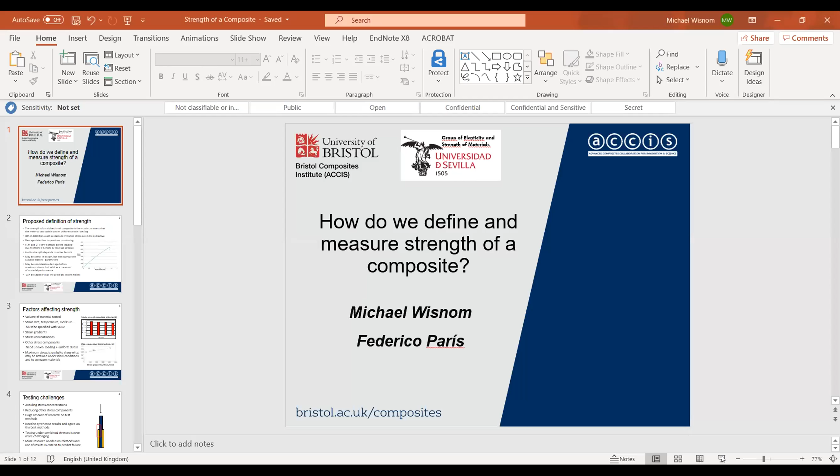It's a difficult question and there are many definitions, but the one we proposed is that the strength of a unidirectional composite is the maximum stress that the material can sustain under uniform uniaxial loading. Other definitions could be much more subjective. If you take damage initiation, for example, it's not very clear exactly where that is, and that depends on how closely you monitor the specimen.

Federico will say a bit more about this later, but if you look at that stress-strain curve, most people looking at this would say straight away it's 550 megapascals. But if you look carefully, you see there's a little glitch at about 380, where the specimen is actually subject to some delamination. So you might easily miss that. If you look more closely you might see it. If you look with a SEM or CT scanning in situ, you'll see it failing even earlier, and in fact there are quite likely going to be damage due to intrinsic defects or residual stresses even before you actually put any load on it, if you watch it closely enough.

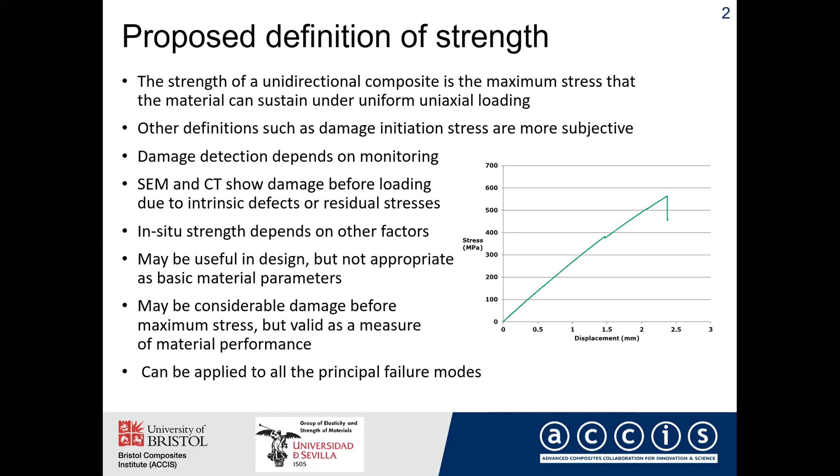So let's talk about some of the issues, some of the factors affecting strength. One factor which is still not widely appreciated is that the volume of material tested affects the strength. You see on the right some results for tensile strength of different size unidirectional carbon fiber epoxy specimens. As the size of the specimen increases, the strength reduces from about 2,800 megapascals down to about 2,400 megapascals.

Of course, there are many other factors which affect the strength: strain rate, temperature, moisture. And I think the key point is that these must be specified with a value.

Other parameters which can also affect the strength are, for example, the strain gradient. This is particularly important in compressive failure. On the bottom right you see a graph of maximum compressive strain at failure plotted against strain gradient, from some tests we did years ago using a constrained buckling rig. As the strain gradient increases, so does the maximum compressive strain at failure. So we have to be careful to avoid strain gradients, particularly in compressive testing.

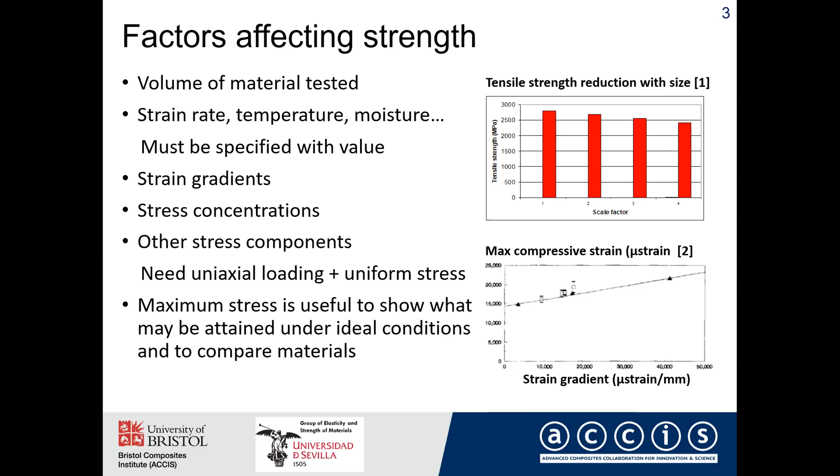It's well known that stress concentrations and other stress components may be present in a test and can affect the result. You need uniaxial loading and uniform stress, which is easy to say on a slide but not so easy to achieve in practice. But despite these caveats, we would argue that the maximum stress is still useful to show what may be attained under ideal conditions, and as a basis for comparing different materials.

There are a lot of challenges in testing composites. Avoiding stress concentrations and reducing other stress components are obvious ones. There's been a huge amount of research on test methods, but I think there's a need to try to synthesize that and come up with best methods. Despite all the work done by thousands of researchers and committees like ASTM and other international bodies, there's still a need for more work to synthesize and really appreciate the results, and try to reach agreement on which are the best methods to use.

And of course, testing under combined stresses is even more challenging. There's clearly a need for more research on the methods, and also on what we do with the results, how we use them in criteria to predict failure.

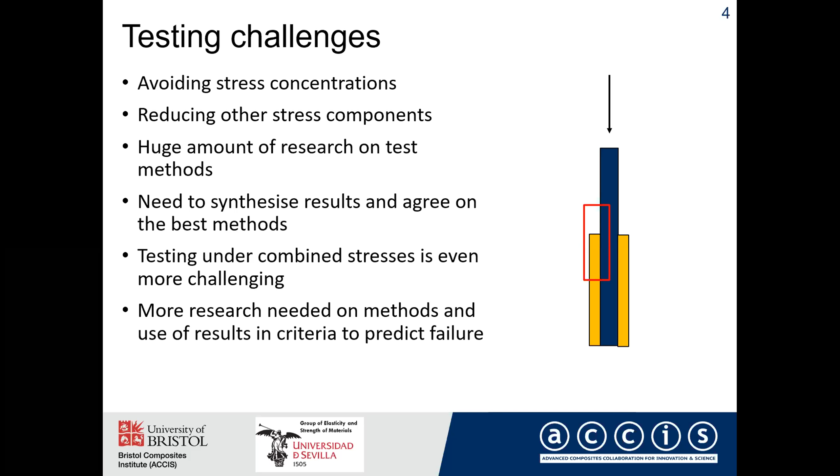Now, when we come on to laminates, it's a whole different question, very much more complex, because in laminates you have multiple potential failure modes that can interact. You've got transverse cracking and delamination, which can interact with the fiber direction response, especially at the free edge.

This top right shows some results we did some years ago on different stacking sequences. These are all quasi-isotropic tensile strength tests of the same size specimens, but you see there's a huge variation in strength just because of different stacking sequences and different ply block thicknesses. So it's not enough to say the strength of a quasi-isotropic laminate, because you can get almost any value depending on these different parameters.

The presence of other stress components: clearly in a laminate, if the laminate is subject to unidirectional loading, then you've got other stress components in the plies, you've got residual thermal stresses, and you've also got constraint from the other plies. All of these can affect the strength of that laminate.

As an example, on the bottom right are some results for carbon-glass hybrid laminates, which show that as the carbon ply gets very thin, the constraint of the adjacent glass plies leads to an increase in the carbon failure strain, quite considerable, from about 1.8 up to about 2.2%. So those sorts of effects mean it's very difficult to talk about the strength of a laminate, because it will depend on so many different parameters.

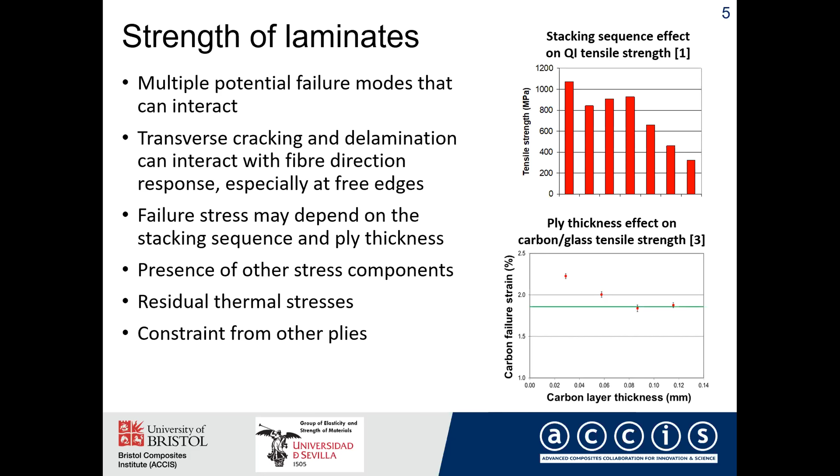Now, in principle, we could come up with a laminate ultimate strength. We could use tubular specimens, for example, to get rid of free edges. We could select the stacking sequences and ply thicknesses to try to avoid premature damage. But even if we could really do that, would that ultimate ideal laminate strength be useful? I'm not sure. And I think this is one of the things that causes perhaps a bit of confusion: why do we want this strength parameter?

Is it to know the ultimate strength of the material as a reference point, or is it something we want to use in design? For design, what we need is allowable stresses rather than the ultimate stresses. Sometimes I've heard companies complain about some tests because they give too high a value. So as researchers, we want to know what the ultimate strength is, but actually when you're designing, you want to be conservative and make sure you're not going to fail. So I think there's a difference between allowable stresses and actual fundamental strengths.

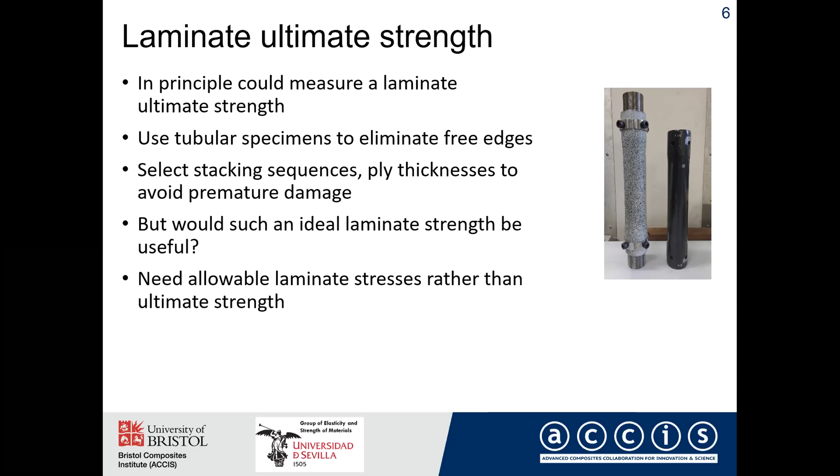If you look at things like notch strength, then this depends on all sorts of other parameters: the laminate thickness, ply thickness, stacking sequence, laminate width to notch ratio, all sorts of additional parameters. And compression after impact also depends on many parameters.

So these are useful tests which should give useful information for design, but they can't be considered to be ultimate material tests. They're not generating material properties. They're generating useful values which can be used in designing.

And strength of components, I would argue, is a structural phenomenon rather than a material phenomenon. In structures, you've got more complex stress distributions. You may have interaction through thickness and in-plane failure mechanisms. So it's much more complex.

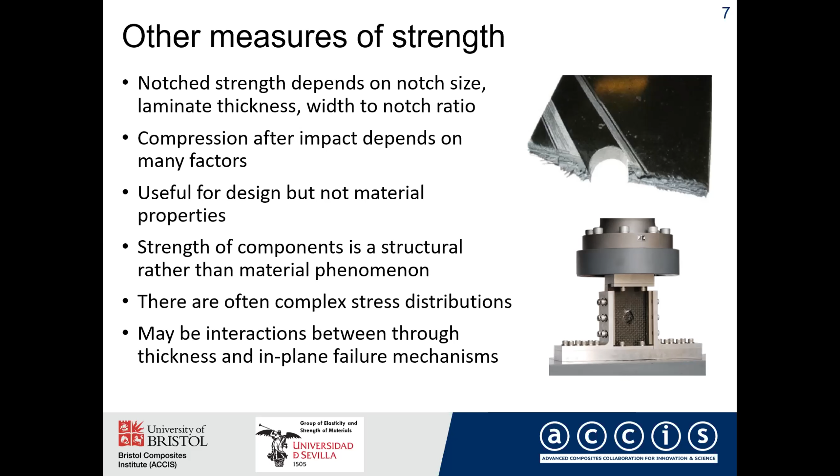So a bit about terminology. Failure strength is quite often used, the term, and I think this is a contradiction in terms, and I think it should be avoided because failure and strength are really opposite sides of that. So I think this is not a good term.

It's a mixture really between strength and failure stress. Now, strength and failure stress are often used interchangeably as well, but I think they should be distinguished. I think we should keep strength as a term reserved for basic, fundamental, unidirectional material strength, and failure stress we use for other cases.

So, for example, rather than talking about CAI strength or open hole tensile strength, we should talk about CAI stress or open hole failure stress. It might seem a small distinction, but I think it's important in being clear on our terminology.

And of course, we must also specify the measurement conditions under which these have been obtained.

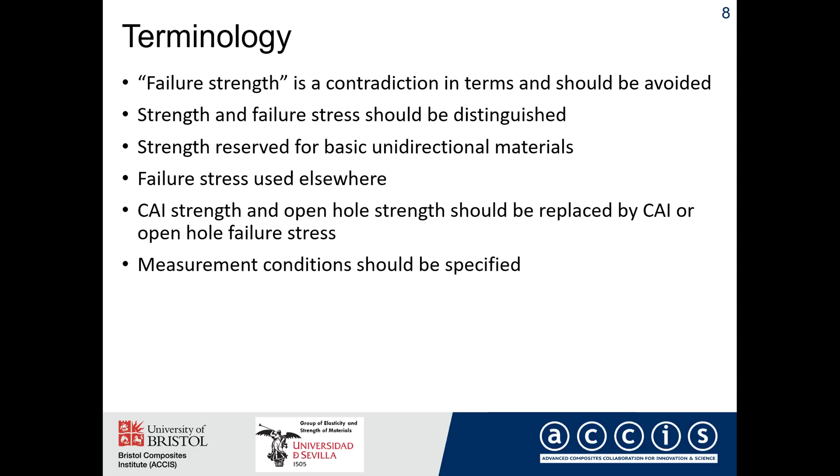So in summary then, we would argue that strength as a material property should only be used for unidirectional composites under simple uniaxial stress states, and that strength should be defined as the maximum stress that can be attained prior to total failure. It should be stated together with the volume of material and the conditions under which it was measured, and the strength should be measured under uniaxial uniform loading. And the results of laminate and structural tests should be referred to as failure stresses rather than strengths.

So that's my introduction of our paper. And I'm now going to hand over to Federico, who would like to say a few words and give an example, perhaps to illustrate some of the differences which I've mentioned. Federico, over to you.

Federico, I think you're muted.

Yes. Okay. Hello, everybody. First of all, thank you for participating in this meeting. And I have also to say that it has been, for me, a nice opportunity to share opinions with Mike, and I have enjoyed it a lot organizing this meeting.

I'm going to talk, as Mike has said, about one particular aspect of the topic at consideration that I had reflected by this expression: strength, damage, or rupture. And I'm going to talk about a particular case, which is the case of one laminate, a typical laminate, the 0/90 symmetric laminate, and what we typically assign or call scale effect or in situ strength.

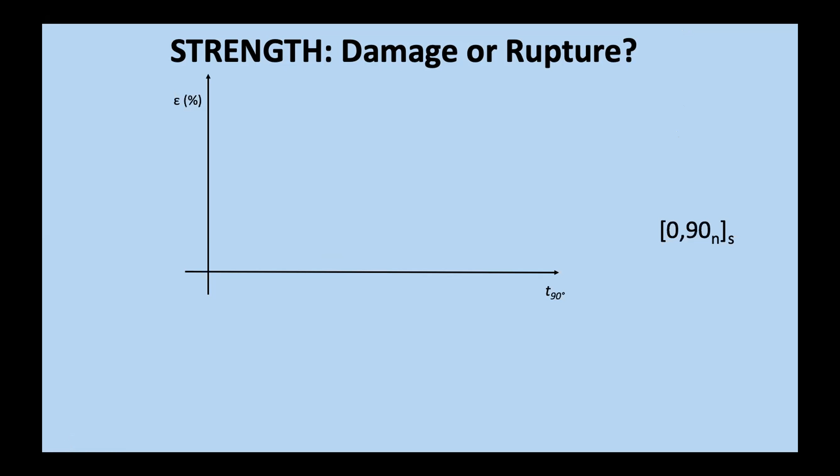So if we represent the value of epsilon that produces the failure in general terms as a function of the thickness of the 90-degree ply, we have, first of all, the value of epsilon associated to YT that we have obtained from a specimen applying a uniform distribution of stresses.

Additionally, we have another significant curve, which is the value of epsilon to produce the energy required to generate a complete transverse crack in the 90-degree ply. So typically both have been used as complementary criteria to decide what happened in a lamina, or a 90-degree lamina, put in a laminate.

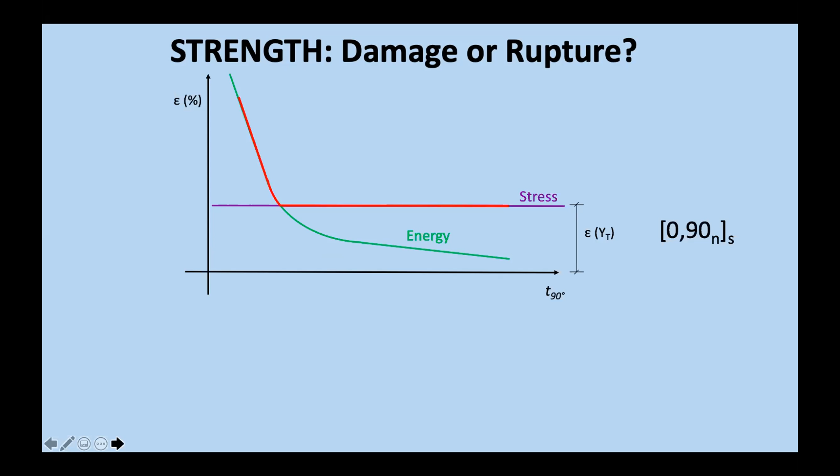So this gives rise typically to the in situ strength, a concept that assigns a value of the strength higher than that corresponding to the value of epsilon associated with YT.

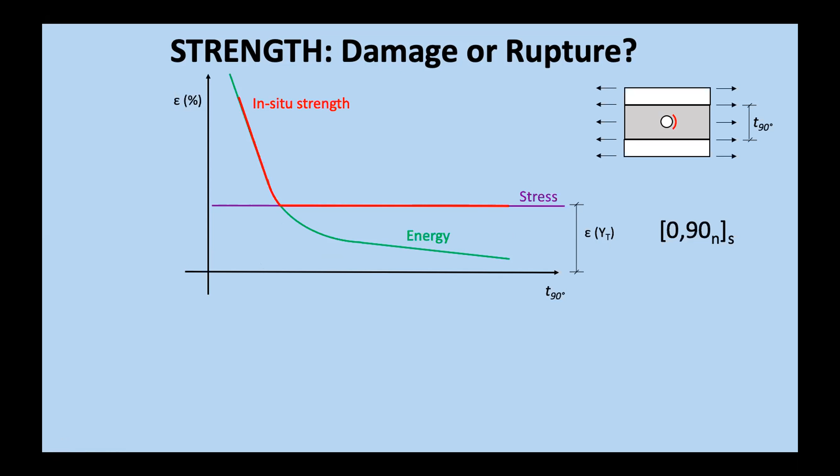But the question is that a couple of years ago, doing some numerical research, our predictions indicated that the appearance of one isolated debonding was not a function of the thickness, which was something that surprised us.

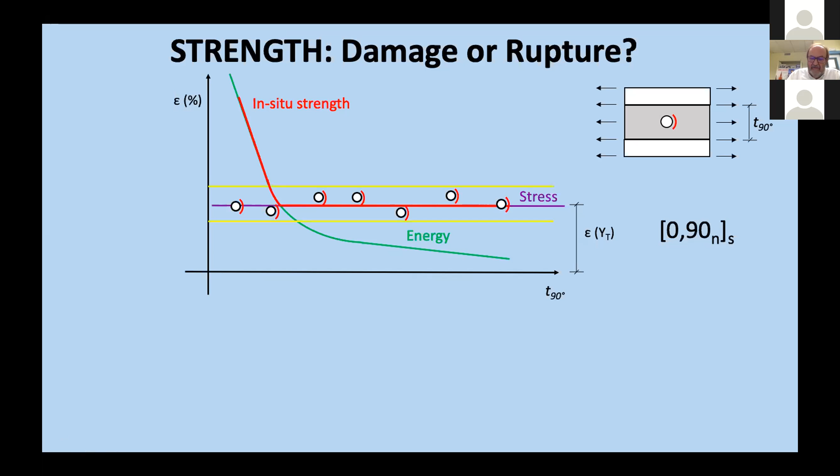So it means that, for instance, if we take a very thin laminate, I mean, a laminate with a very thin 90-degree lamina, we could have at this level of deformation of epsilon, one debonding, which would be independent of the thickness. So we would have, in accordance with the prediction, the same similar value. In fact, as it is a non-homogeneous material, we would have an interval where this appears.

However, when performing tests, the first thing you see of damage is indicated here for a very thick 90-degree lamina. So suddenly, with no previous indication, you will have a complete breakage.

You will have a complete breakage of the lamina associated with delamination. If now we go to a smaller value of the thickness, we have something similar, but without delamination. Even with a smaller thickness, we have something like this, where we have not totally reached the thickness of the 90 degrees, but continue in a similar situation as previously.

If now we move to this case, we have clear indication of isolated debondings. On the left-hand side, the original micrography, on the right-hand side, a recreation to see it clearly. So if we have a thickness like this, we have a situation with some isolated debonding, maybe connected. Now, what happens if we increase the load here?

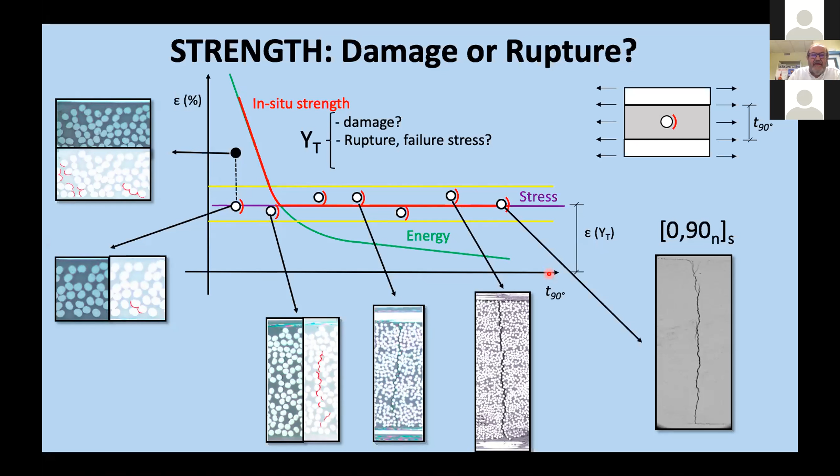So, to conclude, how are we going to proceed? If we want YT to be associated with the appearance of damage, then this value is correct for all types of thickness. If, on the contrary, we prefer, which is the typical approach, to have it associated to the rupture in a general term, probably it would be better to refer to this situation as failure stress.

And it would even be better to give a designer some indications about values that he can reach, not putting into question the integrity of the laminate.

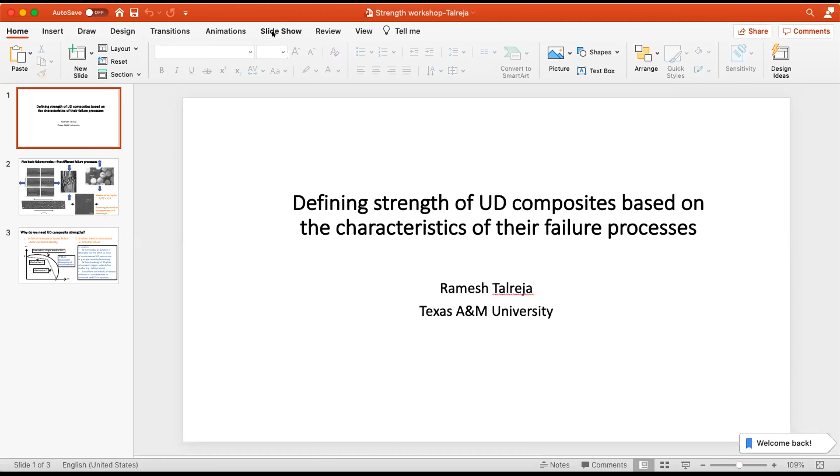Well, what I'm going to say is not really going to be anything new. In the white paper that Michael and Federico put together, you actually have lots of questions, and it's a broad discussion of the strength concept. What I try to do here in the next few minutes is bring focus to the idea of what is actually strength, and why do we need it, and in what context it is useful at all.

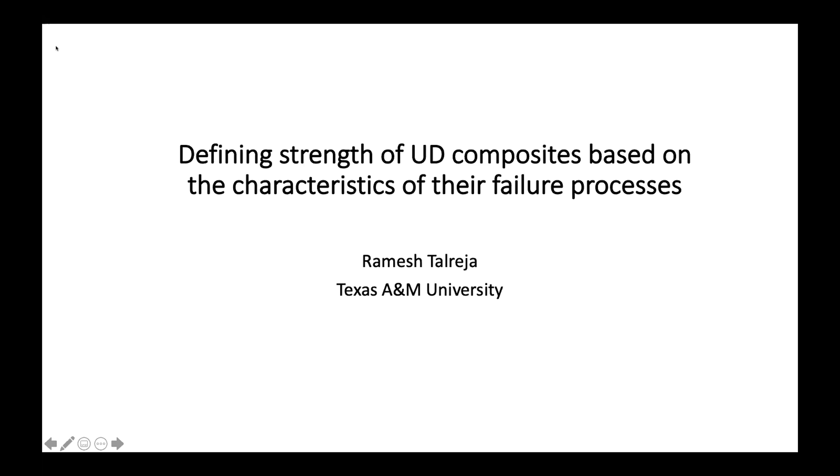So I'll go to the 2 slides that I have. As I say, a picture speaks 1,000 words. So what I have done here is take 5 typical pictures of how observations of failure mechanisms appear when you take a unidirectional composite and load it in 5 basic modes.

So you're looking at tensile mode in the axial direction, compression loading in the axial direction, tensile in the transverse direction, compressive in the transverse direction, and in-plane shear. Now, you may all know these things, seen this before.

If you keep in mind where the concept of strength actually comes from, it comes from metals mostly. And there, whether you load in one or the other way, in any of these 5 loading modes, there's only one mechanism, which is yielding. So initiation of yielding, that we call yield strength, and then ultimate failure that comes from continuation of yielding to a complete failure in one form or another.

But here in composite materials, each loading mode has its characteristic failure mode. Consider the tensile mode: it is highly statistical because it has to do with singlets and doublets and forming of a cluster of broken fibers. It's a highly stochastic process. Reverse the loading, and it's much more deterministic, much less stochastic.

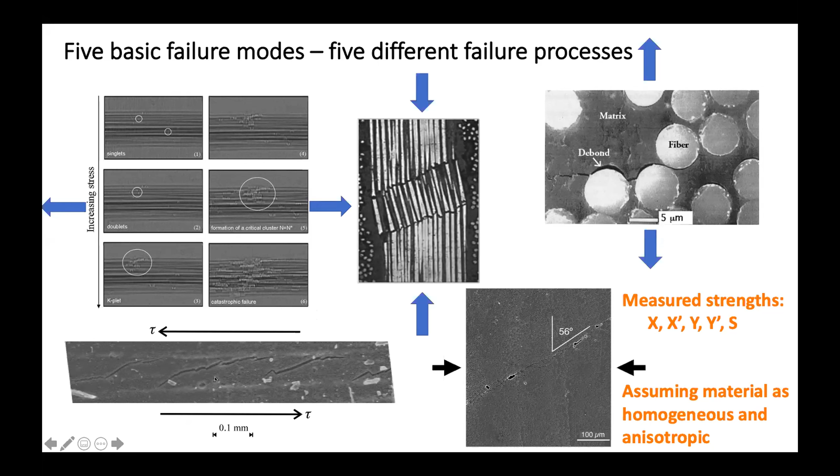It's not being caused by shear at all. So these cracks that are there, they are most likely because of a tensile stress locally here.

Now we ask ourselves, we follow the tradition of centuries working with metals, and we give designers something that we call strength. What is really the utility of that? I'm going to take two areas in which we typically want to use the UD composite strength.

One is in combined loading. There's hardly any structure that doesn't have combined loading, right? So if I am applying any of those two of the five modes of loading that I described, and I plot one on the vertical, other on the horizontal, and I ask myself, if I combine those two loading modes, what's going to happen? Our thought process has this legacy of metals where we find that the von Mises criterion gives this sort of a curve.

But what we probably forget is that it is talking about driving forces under combined loading for one single mechanism, which is yielding. And therefore, a smooth curve like that is expected.

Here, what's happening, if I take one of the failure modes here, other failure modes here, they cannot talk to each other at all. Their driving forces are very different. All they can do is, when I do combined loading versus single loading, the local stress state and therefore driving forces change. It's not the mechanisms that are interacting, it is just the stress state that is changing.

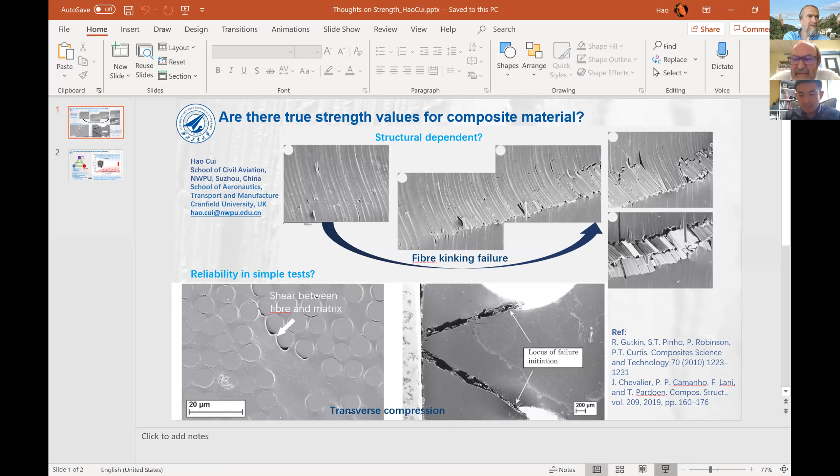Okay, so here I'm trying to ask a question to all of you. I'm not sure if it's the right question or if there's a right answer to it, but hopefully I can spark some discussion later on, or some thinking about the terminology of strength itself.

Here are two images from Silvestre Pinho, who is here as well, and Pedro Camanho, on two different tests. The first is fiber kinking, the failure of composites in longitudinal compression. Shown very perfectly here, in fiber kinking failure, we're trying to measure the strength of the composite in longitudinal compression. The failure is normally initiated by interfiber shear, which can happen in a unidirectional compression test because of, for example, misalignment between the fibers against the loading direction.

This makes me start asking myself: is there a true intrinsic strength for composites in longitudinal compression, or is it rather a structural property even at a unidirectional lamina scale?

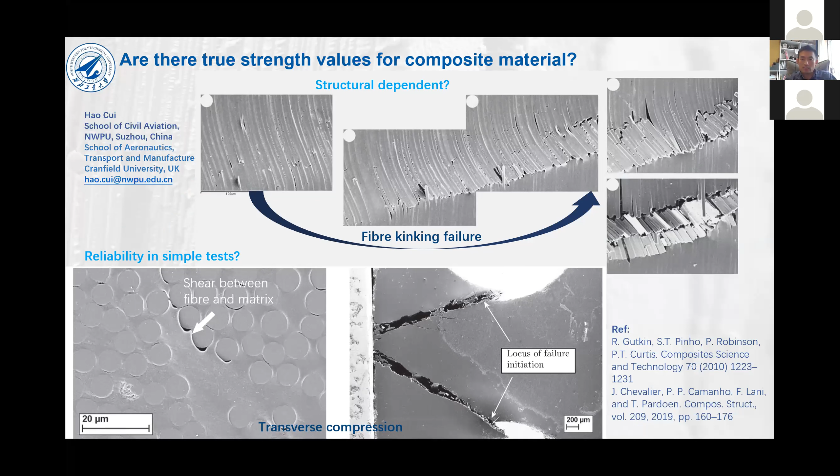When we talk about the strength of a laminate, we have evolved this homogenization process. So what are the consequences of this homogenization? First of all, we have ignored the edge effect at this small scale — for example, we cannot account for the shear or other secondary stresses at the edge.

How do we get a better idea about the consequences of homogenization when we go from a single fiber and matrix to a unidirectional lamina, and further to a multi-directional laminate, where we can even consider it quasi-isotropic? What are the consequences, and what errors are involved in this whole process?

One way I'm thinking about this is, as many of our partners and colleagues have rightly mentioned, the size effect. We see a lot of this — for example, Michael has done lots of work, and many colleagues like Frédéric as well. The strength changes a lot as the volume of the sample increases.

Can we see a similar effect at a macro scale? Hopefully so, because this will help us reach a conclusion on how much error is involved. Because here I see there's a gap.

In numerical modeling using RVE, where we model each single fiber and matrix, we cannot really go very big — there's a limit in computational resources. And for experiments, we cannot go very small. So there's a gap here.

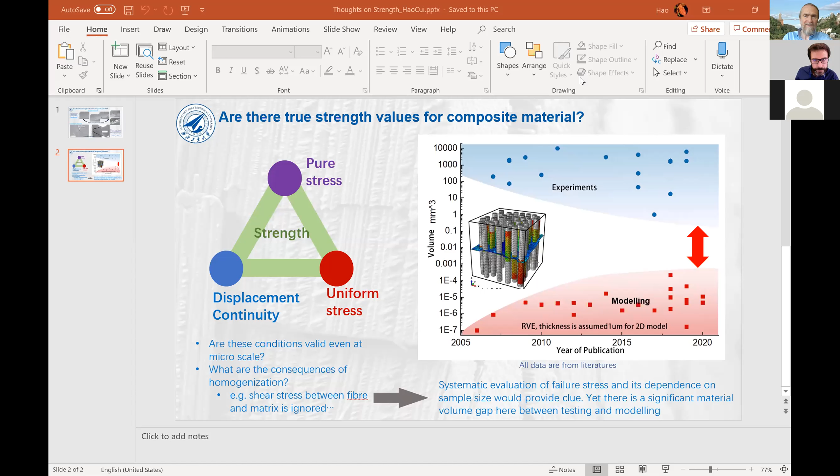Yeah, okay. So I'd like to touch first on the definition of strength. If you look at the dictionary, it allows for strength to be used in many areas: strength of coffee, strength of a market, strength of feelings. If we take dictionary definitions that apply directly to mechanics, we have definitions such as power to resist force, the degree to which something is strong or powerful. And so the use of the word strength when referring to the strength of a structure, say a beam, a bridge, an aircraft wing, or even a multi-directional laminate, from that point of view, seems legitimate to me.

So the key thing to me, I think, is that strength does not necessarily imply it's a material property. The concept does not come from material science. And so we should, I think, be able to use the word strength without the implication of material property. And so if we apply it to compression after impact or open hole, if there is no confusion that we are not referring to material property, I don't see from the standpoint of the definition of the word why it doesn't apply.

Talking specifically about multi-directional laminates, so one of the things that you were saying before, Michael, that the failure stress depends on the actual layup, depends on ply thickness, depends on the interaction between failure modes inside the laminate. I agree with all of that. It depends on those things.

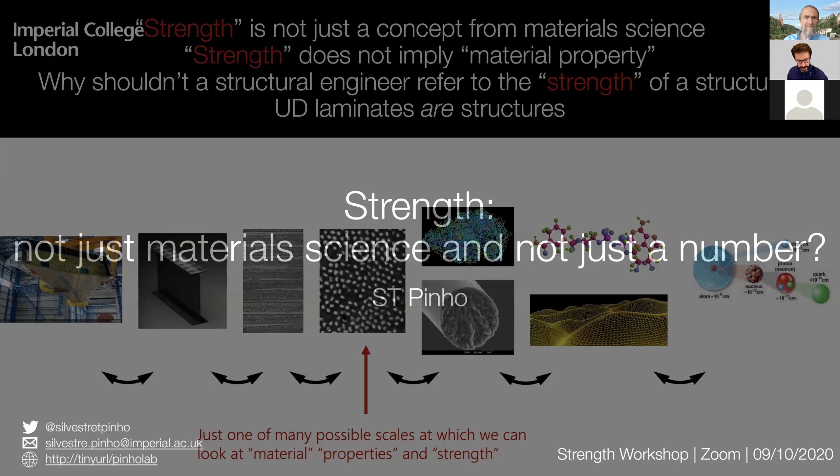Anyway, so if we turn to UD laminates now—oh sorry, I was not showing the right slide. So if we look at the different scales, we are focused at this scale here. But I think that if we were to talk to people manufacturing carbon fibers, they might look at our UD plies and think that this is a structure. And so I think people manufacturing beams could say that for them, they want to talk about the strength of a beam as being a limit bending moment, for instance. People looking at graphene, they might look at the fiber as actually being a very complex structure made of graphene.

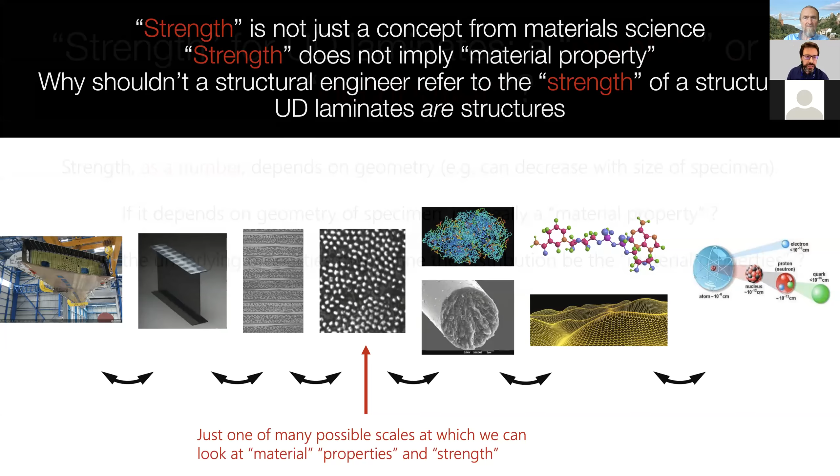But anyway, if we talk specifically about UD laminates, then I'm not quite clear about what definition of strength and of material properties we should have for the strength to be a material property. So we know, and Michael showed this really well, that the strength as a number, say 1000 megapascal, depends on the geometry. It decreases with the size of the specimen. So the strength is a property of the material and of the specimen used to measure it. So it's not a property of just the material.

And if it depends on also the specimen, is it really a material property? Or should the underlying properties that define the strength at each different size be what we consider a material property? So for instance, if we agree that longitudinal tensile strength follows a Weibull distribution, then perhaps the parameters of the Weibull distribution would be material properties, but not the strength at a specific size. Anyway, or otherwise, we could consider that the strength is a stochastic property, not just a number, and then that stochastic property is defined by a distribution.

Anyway, there are two things here about this. One of them is, when we say, is the strength really a material property if it depends on the geometry of the specimen—well, we've not defined what a material property is. And I guess the question is, can we define material property in such a way that we allow it to depend on the size of the specimen used to measure it? What definition would that be?

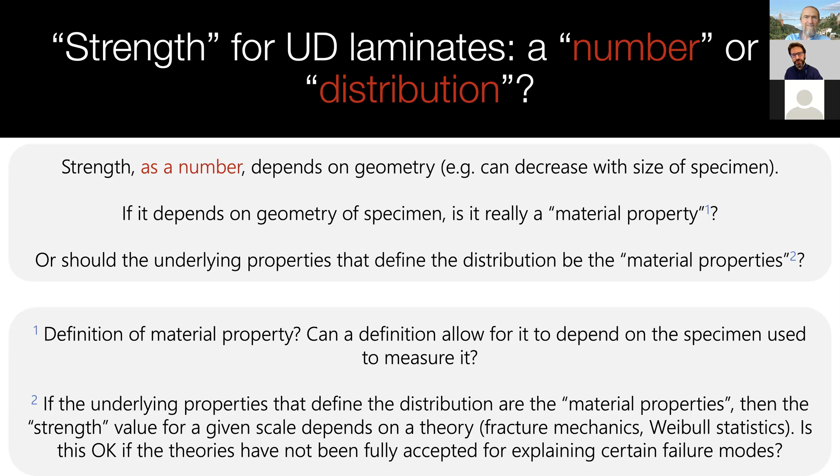If the theory is not clear, then defining strength for the underlying properties becomes tricky as well. And so this is what I wanted to talk about. I'm not exactly in agreement that we cannot use strength in a non-material science context as a summary. I think that if we talk about strength for a UD ply, then perhaps we are not looking at a deterministic variable, but perhaps at a stochastic one.

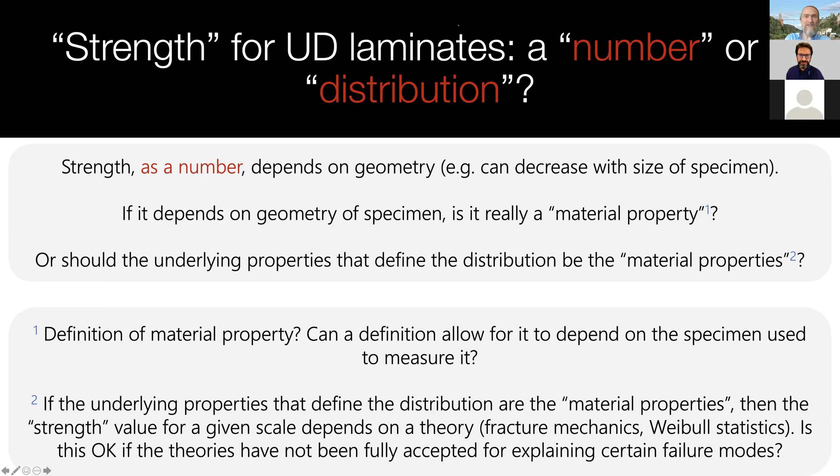Yes, yes. Tony's from the University of Michigan. Can you see my screen? Yes, if you want to put it on full screen mode. Yes, there is. Okay, all right. Thank you. Michael, can you see my screen and hear me well? Okay, yep, so let's start.

Well, thank you for inviting me, and also for giving me an opportunity to share these slides. I think the previous speakers have very nicely laid the foundation for what I have to say. We've heard some really good remarks from everybody who spoke previously. But here I want to make a few comments, sharing my experiences working on this subject for about 35 years now.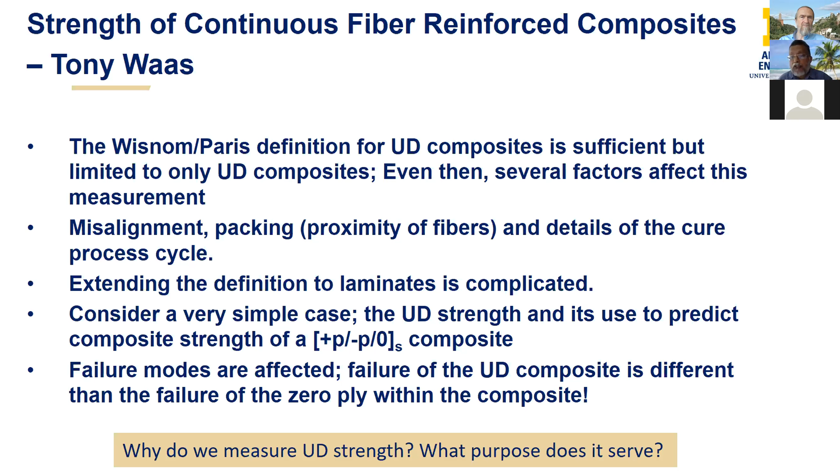So it's very important - failure modes are changed. Finally, what I captured in my previous comments is basically captured here.

Three things I want to say. First, the manufacturing process is important - it can influence the values we measure. So lamina strength is a complex quantity. I have already made that point.

Second, we must do scale-dependent experiments. The speaker from Cranfield said the same thing in a different way. We must have scale-dependent experiments, and there's a gap, right? You can do very small simulations at the nanoscale, but it's difficult to do experiments. You can do experiments with larger specimens, but then simulations won't help you that much.

Finally, we must define homogeneity. If I want to really go back to Michael's definition, we must define what we mean by homogeneity. It tells you clearly, when you start thinking about it, the length scale you're operating in. Homogeneity is a length scale definition, in my opinion. And so with those comments, I'll stop there and I look forward to listening to everybody else.

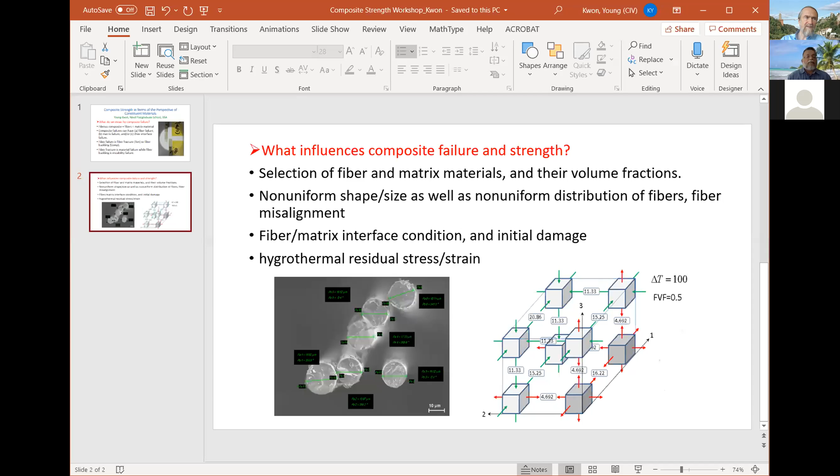So before we talk about the definition and measurement of strengths of composite, I'd like to see what really contributes to the strengths of composite. Since composite is made of fiber and matrix material, I'm going to talk about composite strengths in terms of the perspective of constituent material.

So as you know, composite is made of fibers and matrix, or sometimes you call it particle if the fiber is short and almost the same dimension in every direction. But anyhow, those are the two major materials making a composite. And of course, we are talking about long fiber composite, but it could be short fiber or discontinuous fiber, or sometimes woven fabric composite. But in any of those composites, if you look at the failure at the constituent material level, such as fiber and matrix material level...

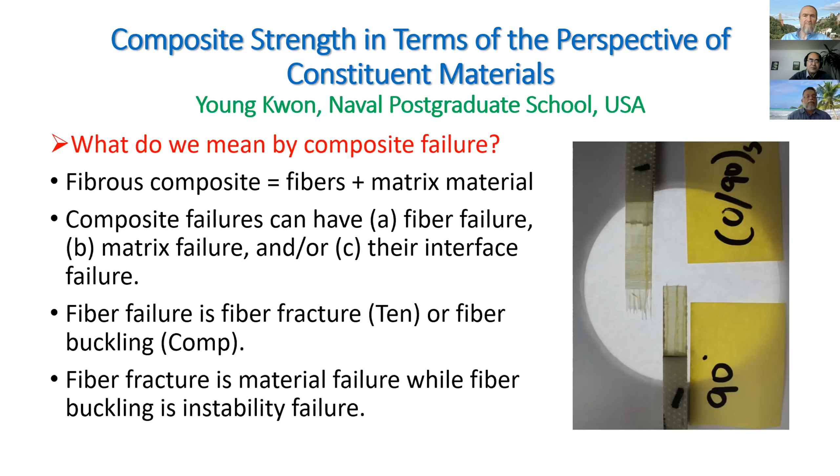And then going to the second question - what really influenced the composite failure and eventually the strength of the composite?

There are many parameters influencing failure mode and failure strength, some controllable and others not. The most significant parameter is the selection of fiber and matrix material, which we can control, along with their volume fraction. That is going to be one of the main parameters defining the failure and strength of that particular composite.

But other parameters, such as shape, size, and more importantly, non-uniform distribution of fiber and fiber misalignment, we cannot control that well. Also, depending on the curing process and the fiber-matrix interface condition, those are also not well controlled, and we have to accept them as they are after the curing process.

There is also some initial damage, such as micro voids or debonding between the fiber and matrix during the fabrication process, and those are going to also affect the failure.

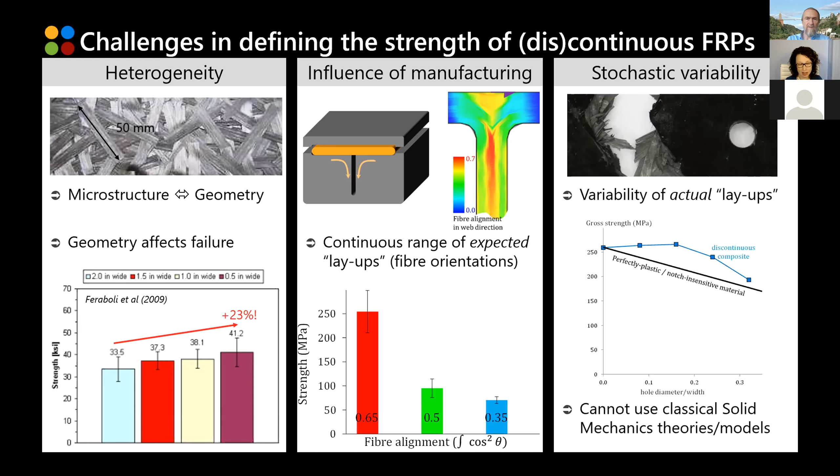So what I would like to discuss now is not the reason why this behavior appears - we understand that, we can even model it - but to actually think about whether we can use some of the discussion we're having in this workshop, mostly for unidirectional composites, and apply it to other types of composites. The first thing I'd like to think about is why do we need to define strength?

Several other people highlighted that it's important to understand why we want to define strength. I think one of the reasons is to guide the material selection and to guide the development of new materials, so we can compare a material against another one.

But again, let's assume we know what our definition of failure is, and we've got a good understanding of what our material strength is. That doesn't mean we're out of the woods yet, because there are still plenty of additional challenges when it comes to then making use of that strength.

So I just want to touch on a few different cases from our work at Bristol, where variable effects can be observed, particularly as one moves up the length scale. If one looks at laminate or coupon level tests, I've got two examples on the screen here, both of

which have localized stresses. On the left-hand side, it's a multi-directional laminate where locally one gets a bit of surface matrix cracking, and that surface matrix cracking leads to some small corner delaminations at the intersection between that matrix crack and the free edge. As you can see from the FE analysis, we get a local stress concentration, and that stress concentration becomes high enough to influence the overall failure of the specimen.

If we look at the net section stress from classical laminate analysis and our useful strength, we'd actually overpredict what is the measured strength. So we really need to understand the mechanisms and their interaction.

This has been touched on by several speakers already. On the right-hand side, we've got a different case with a much higher stress concentration from a sharp notch, which leads to local blunting due to some damage. The crack is starting to propagate, so we have now exceeded the material strength, but in this case local failure does not lead to catastrophic failure, and the specimen is able to continue carrying load.

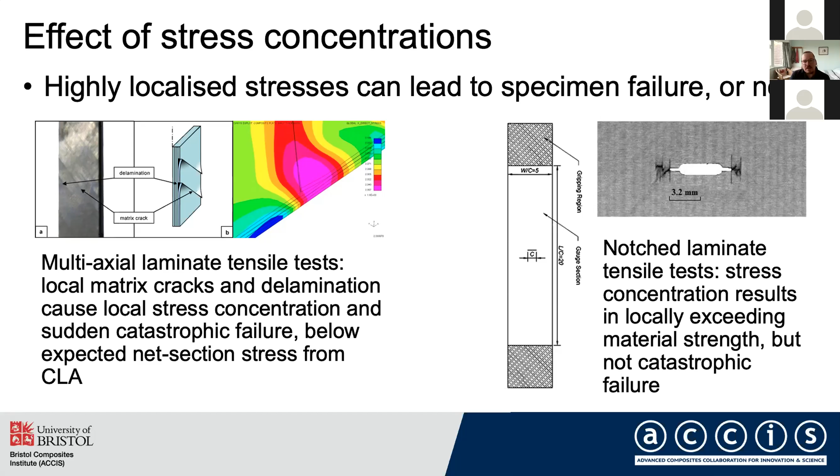Going even further to more structural level loading, where we are looking at more complex geometry and stress states, we measure strength, as Michael and Federico suggested, in a unidirectional stress state, but at a structural level we are more likely to encounter multi-axial loading.

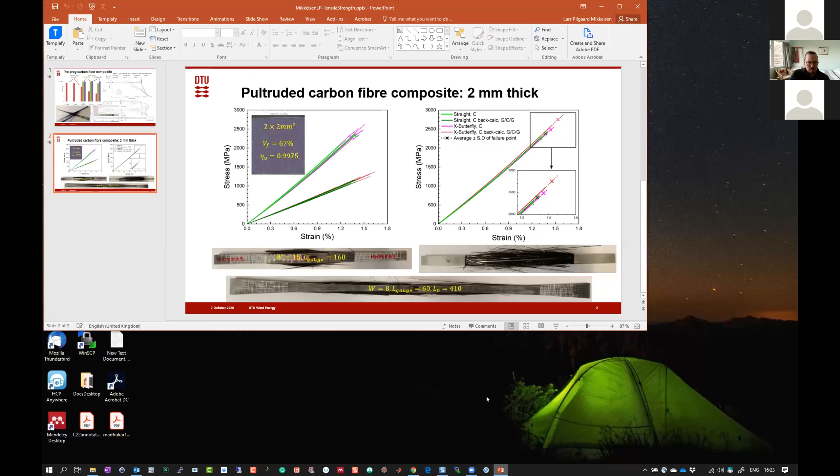Can you see my screen? Yes, that's fine, thank you. Just want to... Yeah.

So I will go down to a very simple case: finding the tensile strength of a UD homogeneous distributed carbon fiber composite. This is a prepreg. We have two studies, one of a prepreg carbon fiber composite and one of a pultruded profile. You can see the structure is rather uniform, and the color codes here indicate the misalignment going from 0 to 5 degrees, so the alignment is really well aligned.

It's a prepreg, so we have a layer structure which you may be able to see here. We tested this sample, putting up more and more layers from 3 plies to 10 plies, and then used 3 different geometries to test that. If you take the rectangular test sample first, that's the red columns here, as the sample gets thicker and thicker with more plies, we can see at a certain point our strength will decrease. We can calculate that we go from a constant stress value to constant load values, indicating something described by a load during the failure, probably some failure happening outside the gauge section.

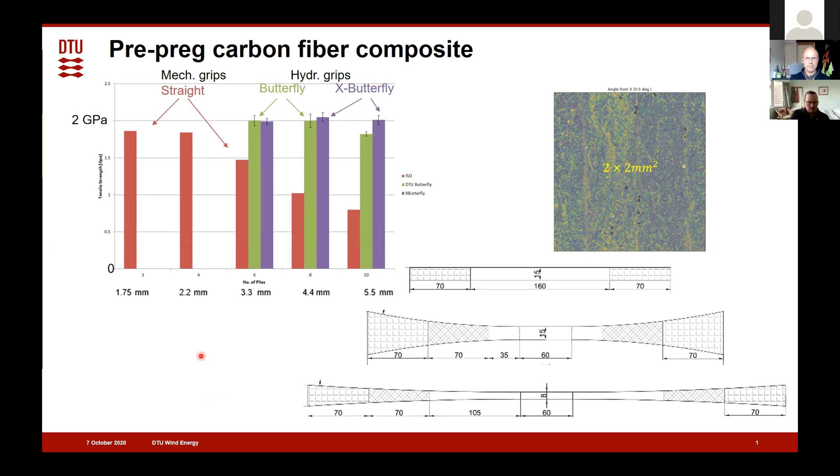So in some way, this is a way to investigate what is controlling the failure of our test sample. It may be difficult to see on the failed sample. So what is the reason for this?

If you do a simple stress analysis of the 3 geometries here, then the blue curve here is corresponding to the rectangular sample, and the green curve is to the long butterfly sample. We have some stress intensity - this is the normal stresses in our sample - where we have the end of the tab material. For the other 2, we have tapered tab material here going from 2 millimeters thickness down to 0 thickness here, and we can see there's also some stress intensity here.

Smaller for this one. I have here shown the normal stresses just below the surface of our test material. But what is more critical, I think, is that - so here this is a stress value - if you look at the shear stresses at that region here, the dashed line here is the thick one and the solid line is the thin one. You can see that we have rather high shear stresses near the end of the grips.

And that's for all cases, so also for the butterfly and for the X butterfly, we have larger shear stresses because that's the only way we can introduce the load from the grips into the test material. So the load levels for the shear stresses are quite high compared to, I would say, the expected shear strength of the composite.

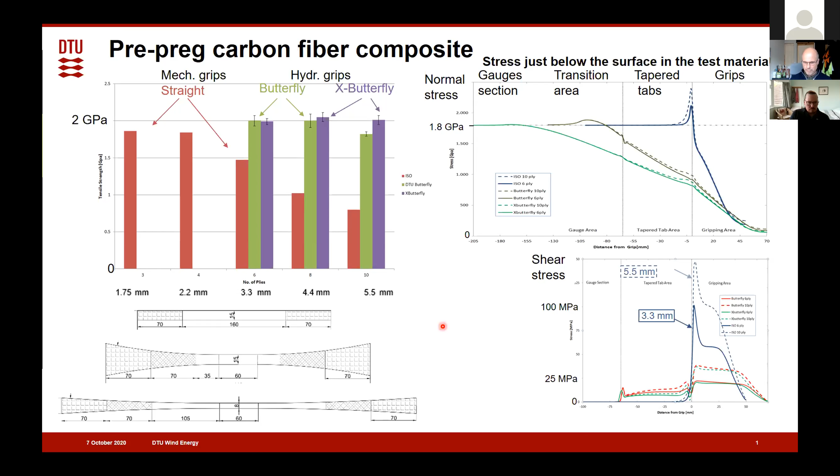And here is indicating, showing the failure of this composite here. You can see this a lot of fiber failure and splitting of the test sample. So it can be hard to identify where the failure happened.

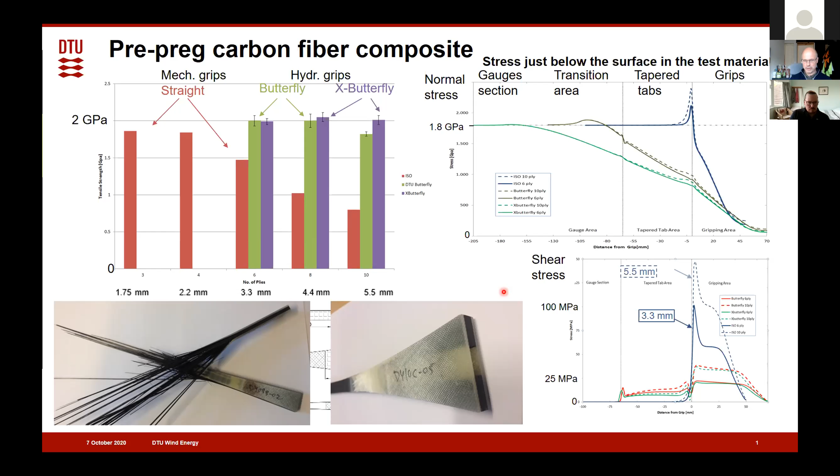For the thickest one, we can see that we have this shear failure between the tab and test material, and we also, for the butterfly shape, we also have splitting along the UD fibers. So this is for the pre-preg carbon fiber composite.

But we have done a similar study for the pultruded carbon fiber composite. For that, we cannot vary the thickness because that's given by the pultrusion profile or the pultrusion process. So here we have a 2 millimeter thick sample again, or even more.

Here we have a case where we have rather uniform distribution of fibers, very aligned fibers. So here's this fiber orientation efficiency factor, which we can calculate - that's reduction, which corresponds to, you could say, the misalignment of fibers, which is very small here. And we also have, for this, even a higher fiber volume fraction.

For the pre-preg, we have 60, but here we have - what is my point? Okay - here we have 67% fibers. This is a rectangular sample, where we can do the tensile test.

Then we need to have - I'll come back to that, the reason for that - how to define when the composite is failing. So here we would like to talk about strain to failure. And here the strain to failure value is defined as the point for max stress, but where we are ignoring this local failure happening before the max load point, by doing a polynomial fitting of our tensile curve. So this test here is then going to one line, and then we have the scatter of the different samples and the mean value of the stress strain curve.

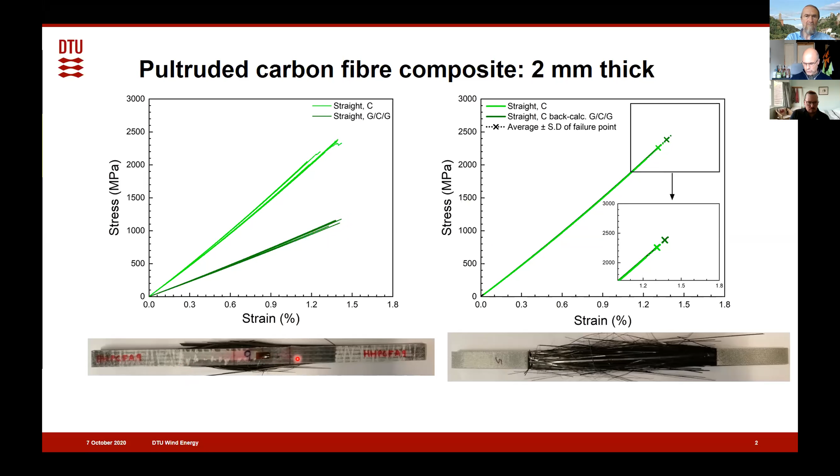But then if we subtract the glass fiber effect, we get the stress value in the carbon fiber. The strain to failure, we just take the values here and put them over here. So we can see that the strain to failure is larger for the case where we have this constraining layer on both sides of our pultruded profile.

Now we could try to do that also for the butterfly shape, and here I only show the results for the extra long butterfly shape. So this is the same shape as before, but now we have put a constraining layer on top of the material, thick enough so the sample will survive the failure of the carbon fiber.

And now we get the purple and red lines here. The red is for the constrained case, and the purple is for without any constraint layer on our extra long butterfly sample. We can see that for the constrained version of the butterfly, we even get higher values here, indicating that we may be closer to the true strength of the pultruded carbon fiber.

But how close we are is actually a good question. You may say that this could be due to a scale effect of our composite. We know there's a lot of, you could say, size effect in the fibers, and we have tested that and find the exponent n value equal to 7. But for the composite, the question is what is...

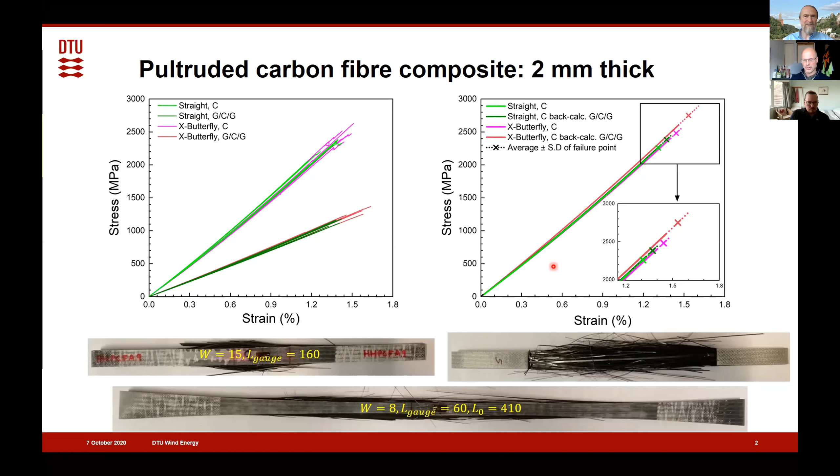But the size effect could only account for about a quarter of the measured improvement of the strength going from the rectangular sample to the butterfly sample. So that's, in short, the conclusion from the size effect. Okay, so thank you very much.

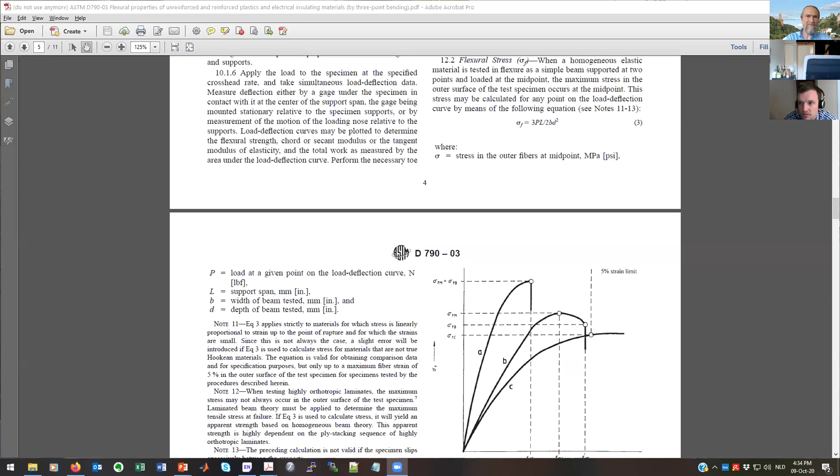So I want to talk about proper tensile testing of UD composites. This is very much in line with what Lars was just presenting. But I want to start off by saying that if you look at the literature and all the tests on pure UD composites in the fiber direction, I would argue that 95 to 99% of that data is actually not reliable. I hope you will be at least somewhat convinced of that when you see some of the results I'll be presenting.

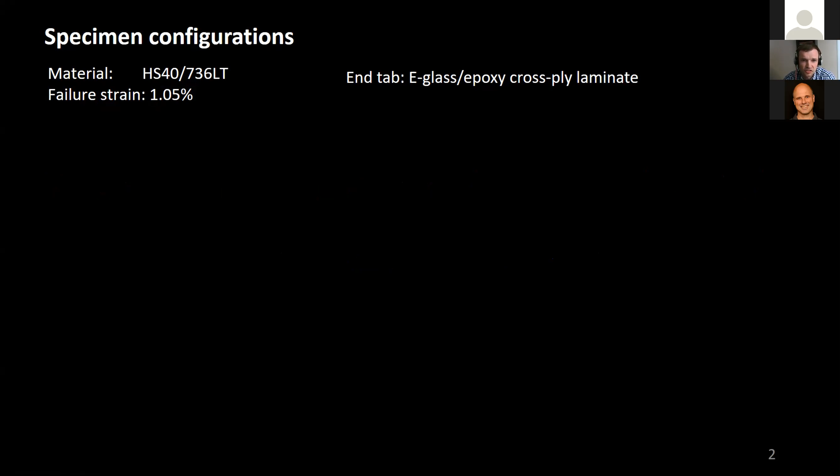So we did a range of tensile tests on UD composites, using HS40, which is a relatively brittle carbon fiber with a failure strain of 1.05% according to the data sheet and a stiffness of 455 gigapascal.

We put end tabs on this, using standard E-glass epoxy cross-ply laminates. We did 6 different configurations, shown here schematically. We used the default approach with no end tabs, then the normal end tabs with a 90-degree corner, then the tapered design which some people believe gets slightly better results than the 90-degree corner, and then the continuous end tab design developed by Michael.

We did something similar with the butterfly design as presented by Lars. And then something more exotic that you don't see often in the literature: arrow-shaped end tabs. These tabs are designed so that the length from this part of the tab to that part is always equal to 150 millimeters, so the volume we're testing is the same as in some of these other specimens, apart from this one where the gauge volume was a bit different.

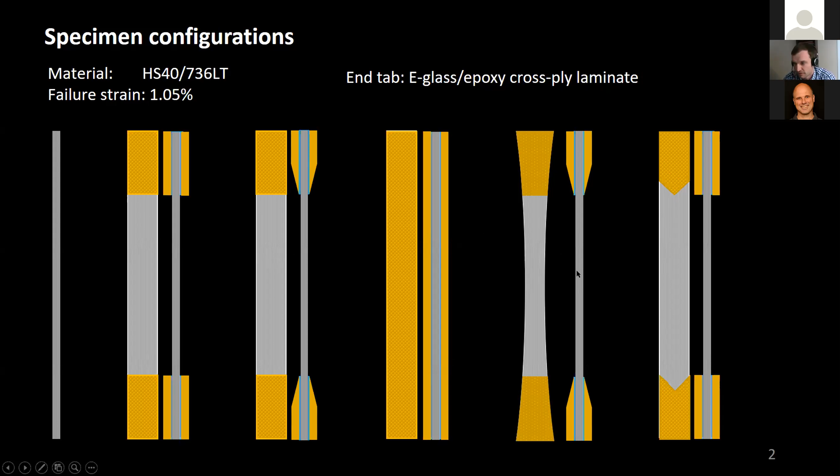If we first look at the first 3 types of specimens, we plot the results in terms of failure strain, since with the continuous end tabs we cannot measure strength directly. If you compare failure strain to the datasheet value I mentioned, you see that for the pure UD with no end tabs, you would get a significant underestimation. But even if you add end tabs, either straight edge or chamfered, you would still be underestimating the datasheet value.

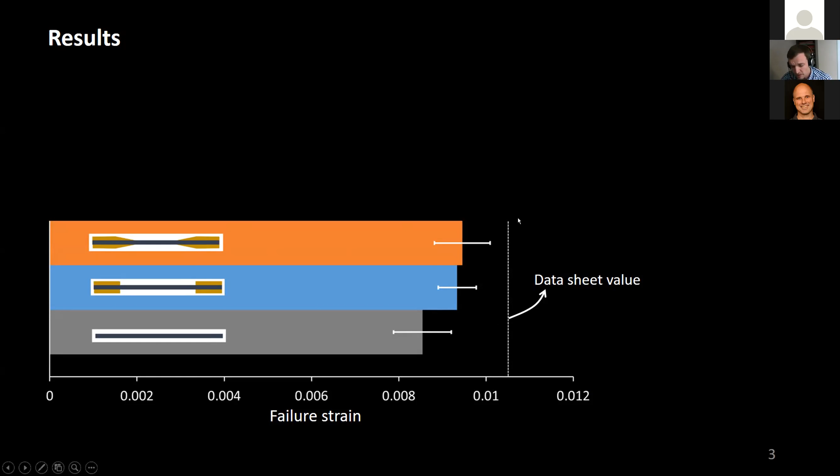Now, if you analyze the continuous end tab design, you actually get pretty close to the datasheet value.

A few things important to point out here. Our plies were well above 100 micrometers, which means there is no hybrid effect, at least if you correct for the thermal residual stresses. The difficulty is that this is actually not a technique that you can directly measure strength with, because that strength requires a back calculation, which introduces some additional error.

So that's why it's better to look at the failure strain in interpreting the data from this type of specimen. The great thing about this test is that you know where the failure happened, and most of the time that actually happens away from the end tabs, nicely inside the gauge section. And that is a big problem with all the other specimen designs, for which if you don't know where it failed, you cannot know whether that particular test was reliable.

Because you don't know whether it failed under uniform stress conditions. So then we had big hopes for the butterfly design, but unfortunately this was in some regards the worst test, in the sense that this gave us the lowest failure strain. I think that is an indication that this was not a very good test, at least not for this specific material. I should also point out that this was the only test that had a smaller gauge volume, which you would actually expect to lead to a slightly larger failure strain or strength.

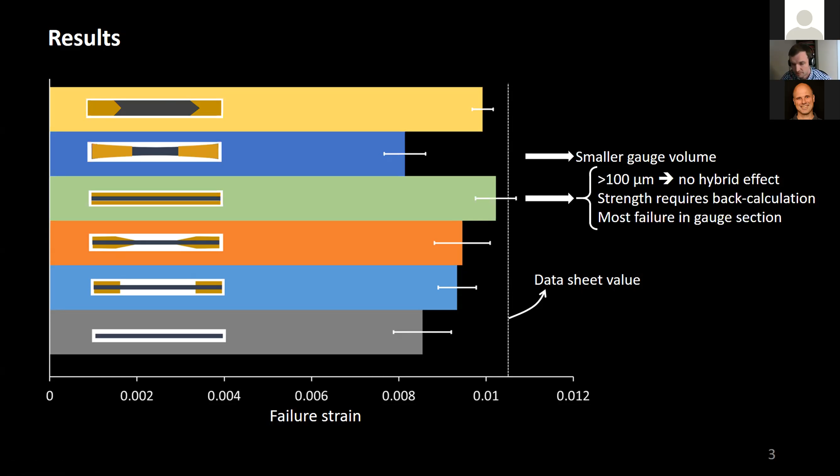And with that, I'll leave you to it, and thank you for your attention.

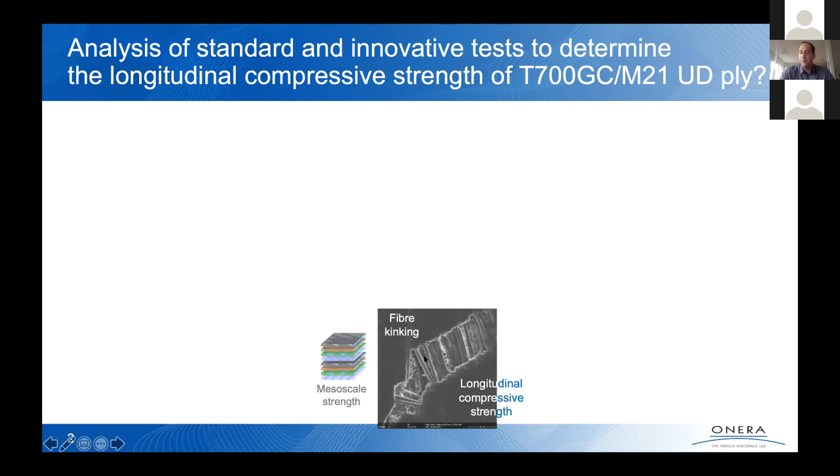I'm going to talk about the analysis of different tests in order to determine the longitudinal compressive strength of unidirectional ply. The idea here is to present you the different available tests to measure a strength defined at the mesoscale, at the ply scale, in order to determine the longitudinal compressive strength, which is associated to the fiber kinking, which has been presented many times before. So I'm going to talk about the tests that you can perform to determine such a quantity.

So you can first perform a standard compression test. You can find here the reference of different standards that you can find in the literature. The major difference between such tests is the manner that you are going to transmit the compressive force into the specimen. You can introduce the loading through end loading, through shear loading, or you can perform a combination of the two.

At ONERA, we have performed such a test on carbon epoxy composite materials, T700 M21. We have performed compressive tests introducing the compressive load through end loading. The test is pretty easy to perform, but you are going to observe that the failure often occurs close to the jaws. This has been clearly explained previously, because at the end of the jaws, you are going to generate in-plane shear gradients, which are going to interact with the longitudinal compressive stress and induce premature failure at the end of the jaws. Therefore, you are going to obtain a pretty large scattering.

In that case, the coefficient of variation of the test was around 10%, which is pretty high. Moreover, because the failure occurs close to the jaws, most of the time you are going to obtain pretty low values of the strength. In that case, it is around 900 MPa.

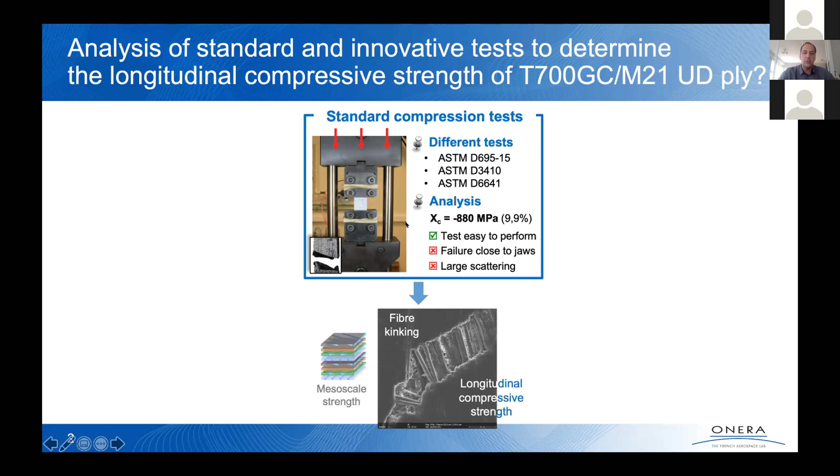So the idea is to propose a test in which we better master the boundary conditions applied to the specimen in order to measure the strength. You can consider bending tests, because for lots of carbon epoxy materials, the longitudinal compressive strength is 2 times lower than the longitudinal tensile strength. Therefore, you can perform a 4-point bending test. The point is that most of the time you obtain premature failure under the loading span. This is the reason why at ONERA we have proposed a compression with pivot device test.

Such an experimental device allows us to generate bending loading by offsetting the midplane of the laminate with respect to the rotation axis of the pivots. If the offset through the thickness is equal to half of the total thickness of the laminate, you generate a quasi-pure bending loading. Therefore, this test is pretty easy to perform. It's just a compression test with the pivot.

A good point is that you are able to measure the strain on the 2 faces during the test pretty easily if you use, for instance, digital image correlation. You can also observe where the failure occurs, which in this case occurs far from the jaws. So that's a pretty good point.

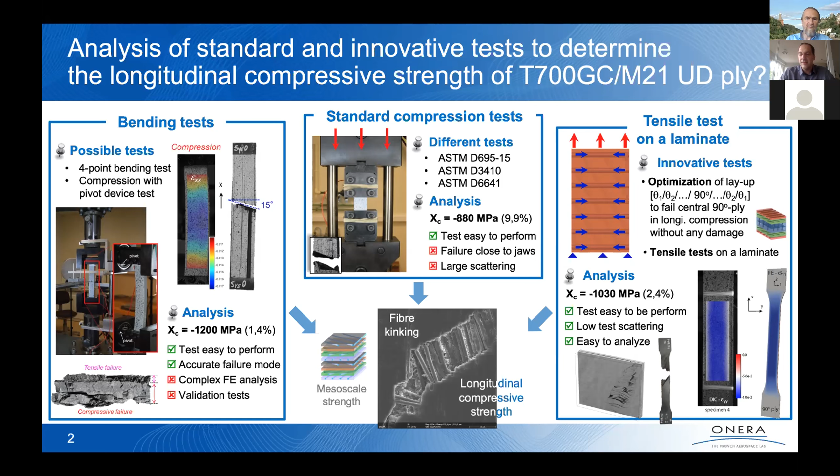My last comment concerning the compression test is really dedicated to whether it is a material strength or not. You can see that the strength associated with bending is higher than that measured considering an in-plane loading. This is also found in the literature for many other carbon epoxy materials, because fiber kinking is really associated with fiber microbuckling, which is not a material mechanism, but, as mentioned previously, an instability phenomenon. So we have to think about the choice of scale we consider for modeling and for analysis of the mechanism, especially for compressive loading. Thank you for your attention.